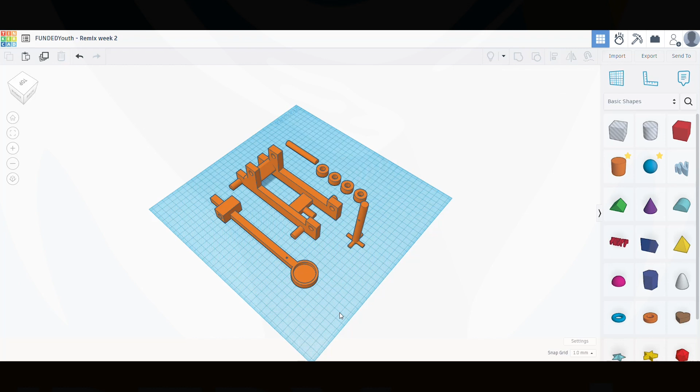Today we're going to start with the wheel. You're going to drag a cylinder onto the work plane and set it to the maximum number of sides, or 64. This is a good time to check that your snap grid is set to millimeters, because we're going to lower this down to 10 millimeters in height, but we will keep the diameter as 20 in both directions. Next, we are going to select our object and duplicate it.

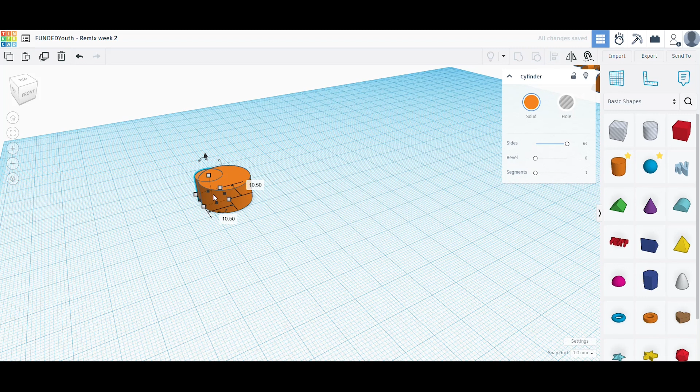Once you've duplicated the object, we are going to change our diameters to 10.5 and 10.5. You can either change it individually or hold the Shift key to change both at the same time, and we'll be turning this into a hole. Now select both objects and select Align, and we will align this to the center. Just be careful of misclicking off because you might need to redo it. Once you have both objects aligned in the center, you can make a hole to give us our first wheel.

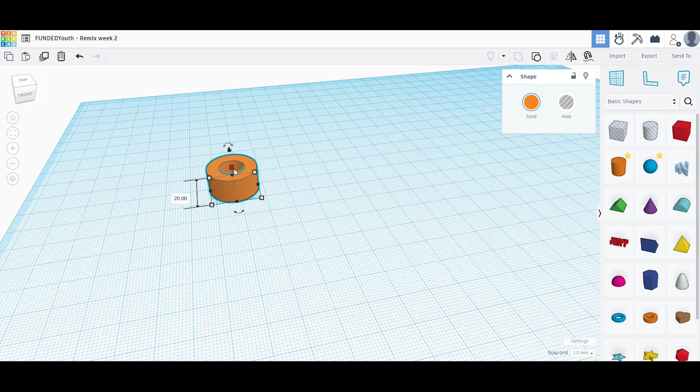Once we've done that, we can simply duplicate it a few more times until we get all 4 wheels. Select all of those, and then we're able to just move those to the top of our work plane so they're out of the way.

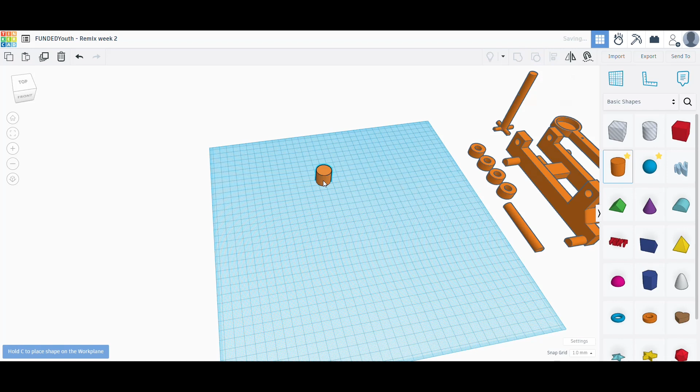Next up, we will be building the arm. Just like the wheels, we are going to start by dragging a cylinder onto the work plane. We are also going to increase the sides to maximum, or 64. For this cylinder, we are going to lower the height to 10 millimeters, and we are going to change it to be 40 by 40.

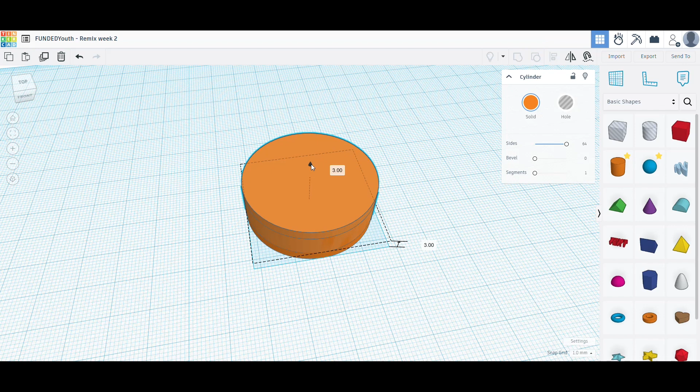Once you have this, we can duplicate the cylinder, and we are going to move this second cylinder up 3 millimeters. Select that second cylinder, be careful you're clicking on the right one, and we're going to change the dimensions to 34 by 34, but keep the same height of 10 millimeters.

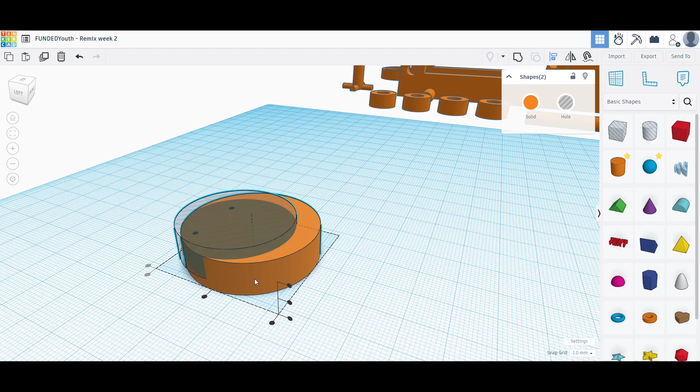After this, you can turn this piece into a hole, and we're going to select and use the Align tool to center it. Make sure that you've selected aligning off of the bottom cylinder, so that way everything remains lined up and 3 millimeters from the base. Once it's properly aligned, select again and group your items to create the top of the arm.

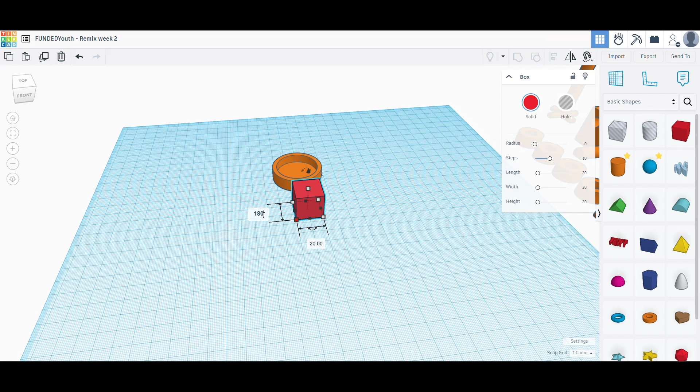Next, you are going to drag a cube onto the work plane. We are going to adjust the dimensions of this cube to be 180 in length, going away from the top cylinder we've created, and then it's going to be 10 width and 10 height. Once you've adjusted all of your measurements, it should look something like this, and you are going to roughly align it to the center of that top cylinder that we created.

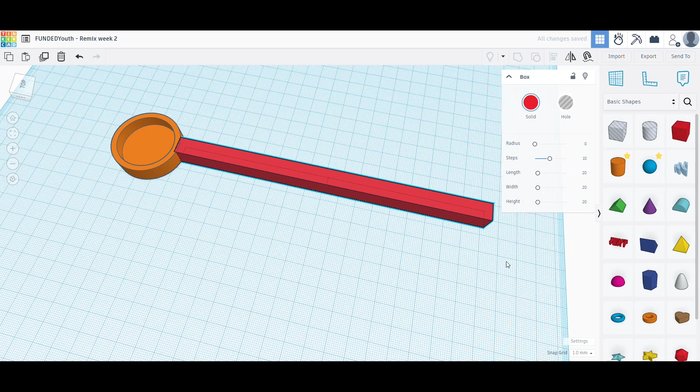Next, we will be dragging another cube onto the work plane. The only adjustment we're going to make to this one is making it 35 millimeters in length. After that, drag a cylinder onto the work plane as a hole and place it against the side of the cube. We are going to adjust the cylinder to be 10.5 in diameter.

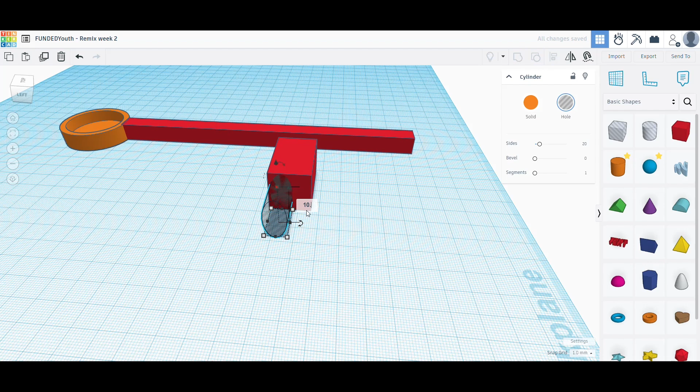And we're going to select both and align. Make sure that you're aligning to the red block so that way the hole can be centered on the object. You can then extend this object to go all the way through your block. If it's easier, you can also just call this length 45 millimeters and center it within the block.

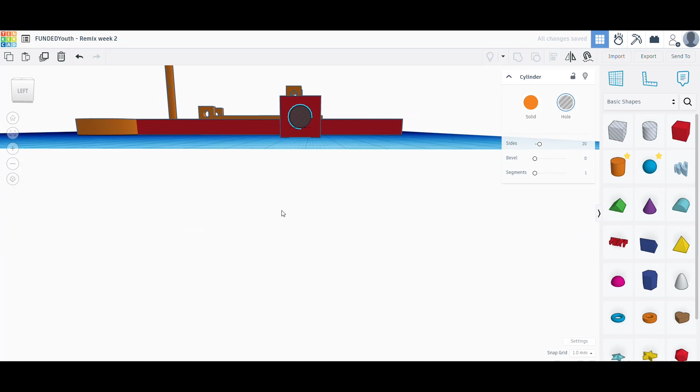Next, we are going to select the cube, the hole, and the earlier rectangle that we placed onto the work plane. We are going to align all 3 of these objects together. Make sure you're aligning them to the red block with the hole in it. You will want to make sure that the pin is centered, and then align it to the end.

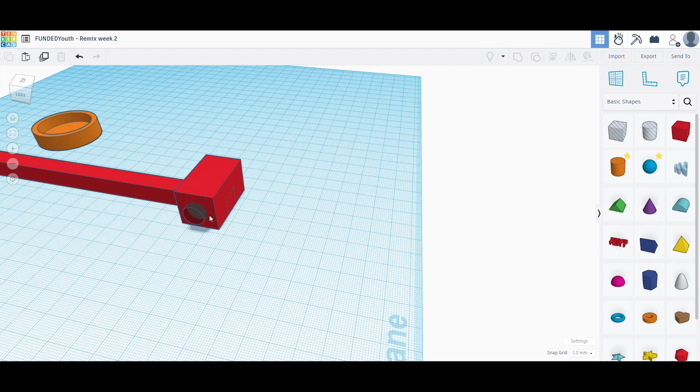Once everything is properly aligned, we are going to select that middle pin, and we are going to move it until it reads 35 millimeters away from the end of the block with the hole. Once this is done, you can select it and make sure that it is still properly aligned to the center in case there was any wiggle when you were moving it. And once that is done, you can finally group all these objects together.

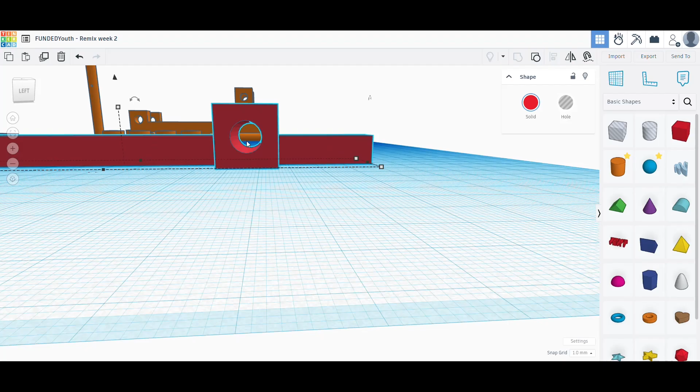This way, the hole will be able to go through both the block and the arm that we've created. Now we are finally ready to align the arm with the top of the head. Roughly bring the objects over and then select all of them and align to the red pin, so that way that orange cap is centered.

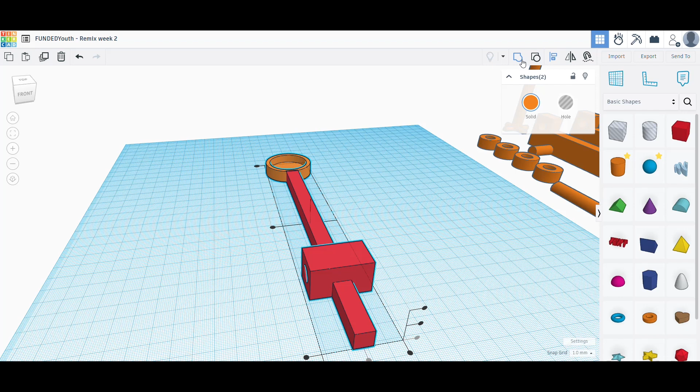Once everything is centered, we can group the object together. Once we've done this, we're going to drag another hole onto the work plane, and we are going to adjust the size to be 3mm by 3mm. This will be placed a little bit away from the top of the head, wherever you want, and we are going to align it to the center. And then once that is done, you can group it together, and that is the arm complete.

Next up, we are going to work on the turnbuckle and pin part. Drag another cylinder onto the work plane, and we are going to adjust the size of this to be 9.5mm in diameter both ways, and we are going to make it 100mm tall.

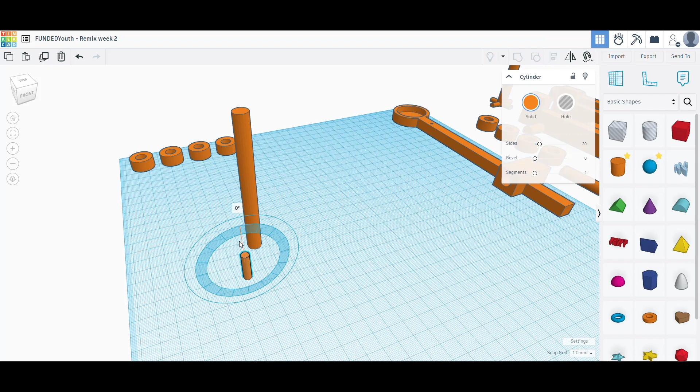Once you've done this, we are going to drag another cylinder onto the work plane. Then we're going to change this cylinder to a size of 5 by 5, and we will rotate it 90 degrees so it's perpendicular to the first post we made. From here, we are going to extend it to an overall length of 30mm.

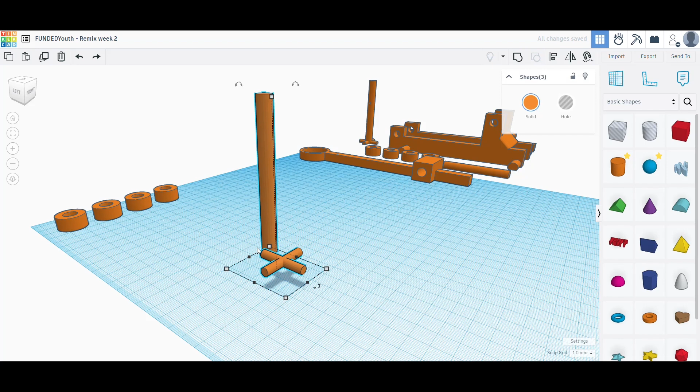Once we are at our final length, we are going to select the object and duplicate it. Then we'll select it, and in the horizontal plane, rotate it 90 degrees to create a cross. You can then select and group both items. Once these objects are grouped, you can lower them together, so that way they are on the base of the work plane.

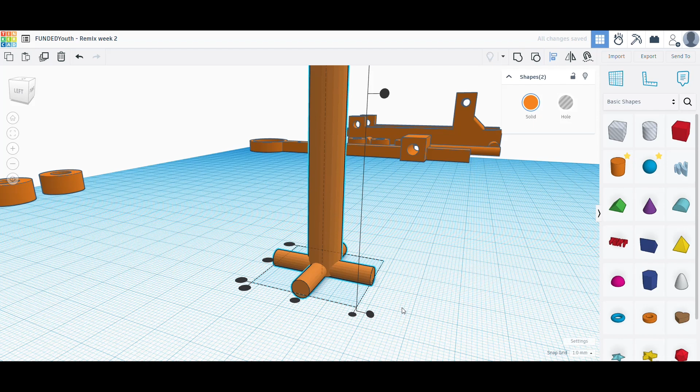And from here we can align our central post to this cross post. Select all your objects, click Align to make sure everything is perfectly centered. And once centered, group all the objects together.

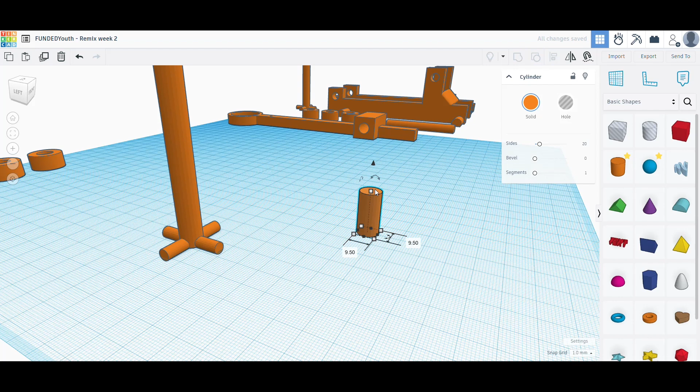Once this is complete, we're going to drag another cylinder onto our work plane. In this cylinder, we are going to give a diameter of 9.5 both directions, and our overall height is going to be 70mm. Now we're going to select this pin, we're going to rotate it 90 degrees and bring it down level with the work plane. Here you can see that it's currently 2mm below the work plane.

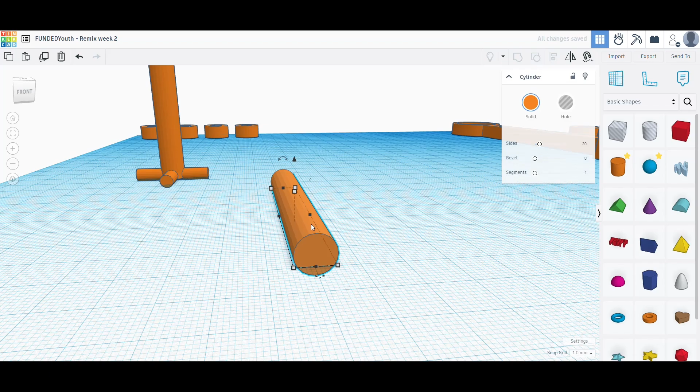We're going to duplicate our object, and we are going to move the second one off to the side. This piece will be used again later when constructing the main body. Now we can place our pin next to our stand, and we're going to select the hole block. We're going to make it go below the work plane and then large enough to encompass both the bottoms of the pin and the post.

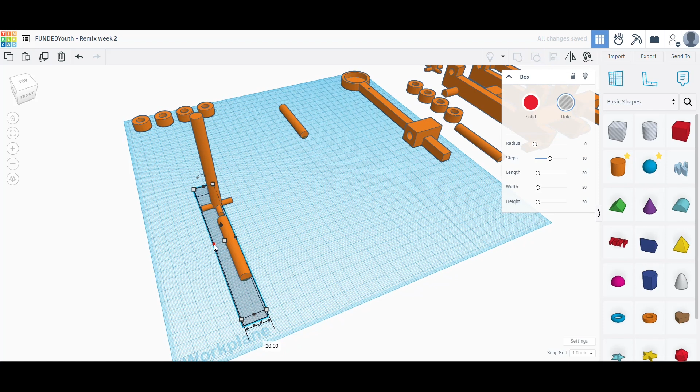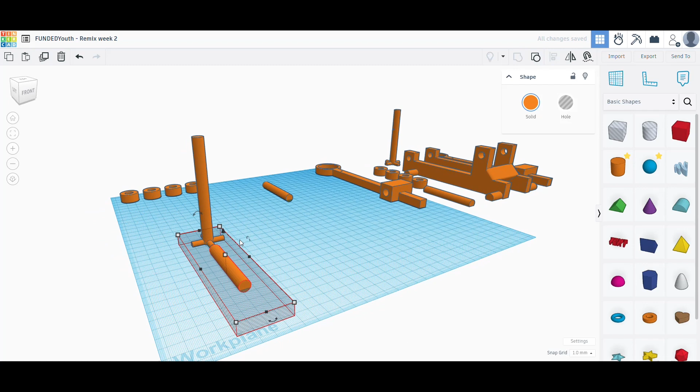We are doing this in order to create a flat bottom so that way when we take this file and 3D print it, it has a flat base to rest upon. We will make sure that everything is properly grouped with the hole, selecting all the objects. There we are. This way, when we click off of it, you can see that there is now a flat base on both the post and on the pin.

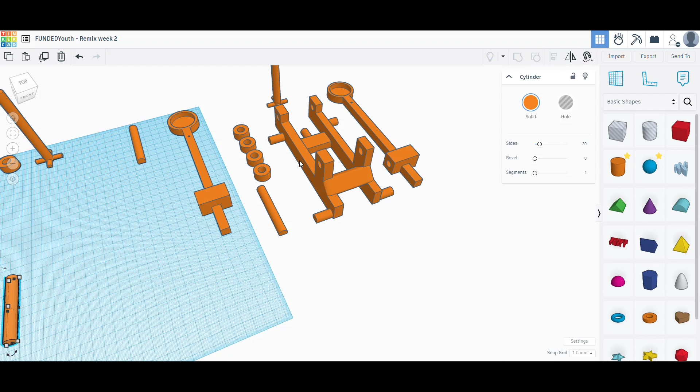We can now move this off to the side and prepare our workspace to finish this catapult off with the main body. Select that pin that you finished earlier and pull it into the center of your work plane. This will be used in part of our construction of the main body. We are going to move this pin off to the side and we are going to shorten the overall length to 20mm long.

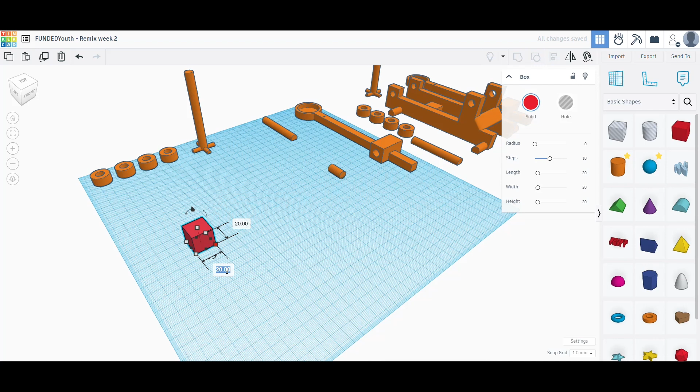Once this is done, you can set that off to the side for now, and we are going to drag a cube onto our work plane. We are going to change the length and width of this cube so that way it is 60 by 175mm. This will form our base, and we are going to leave the overall height at 20mm.

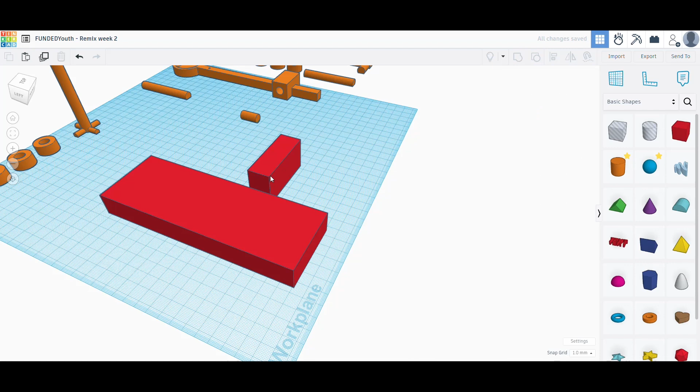Go ahead and drag another cube onto the work plane, and on this cube we are going to change the width and the overall height. We're going to make the width a total of 60mm, and we're going to change the height to 30mm. We'll leave the length as 20. Go ahead and duplicate this object so we have two of them, and we're going to extend the height of this one to be a total of 60mm.

Next up, we're going to select our first block and we are going to align it to the front of our base. You can just select both objects and we can use the Align tool to make sure it's perfectly centered and flush to the front.

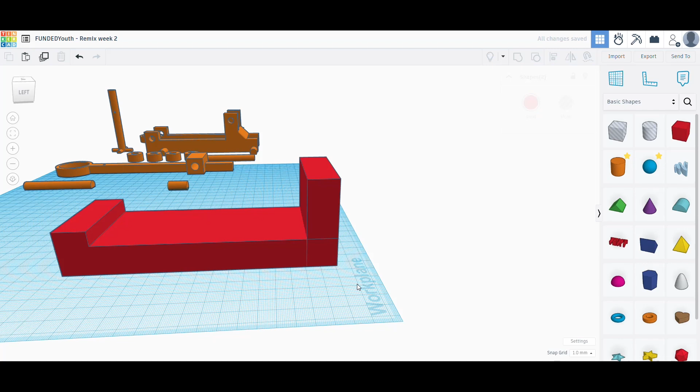Next up, we are going to do the same thing with the back piece. We're going to align it to center and to the end. Once this piece is aligned to the end, we are going to select it and move it forward 35 millimeters. Once you've moved this piece forward, we can select all these again and use the Align tool to make sure it remains in the center.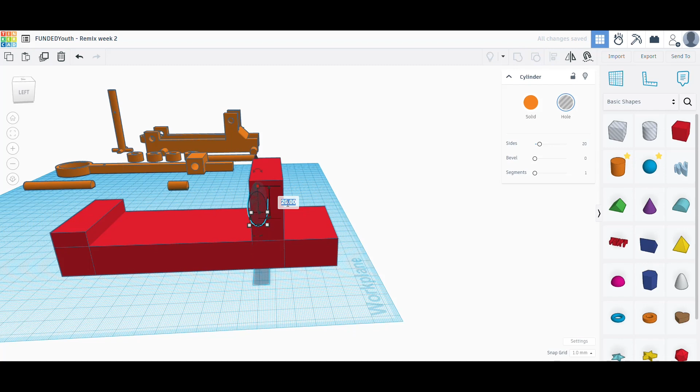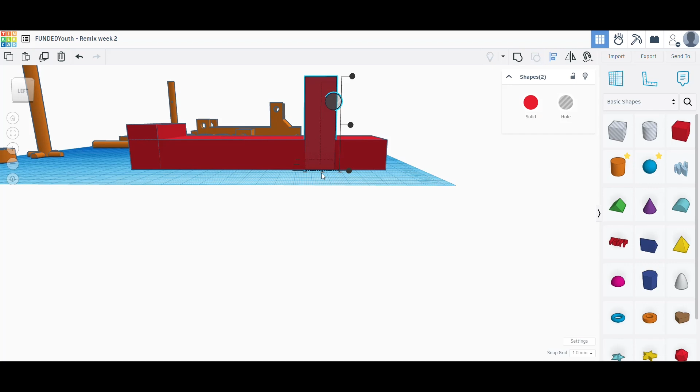Before we group it, we are going to add a hole. We are going to adjust the size of this hole to be 10 by 10 by 69. This way the hole will extend all the way through the block. From here we can select the hole and that piece and make sure that they are both aligned to the center of the red block.

We're now going to adjust the height. Go ahead and bring your hole all the way up to the top and then bring it level with it. Then slowly begin bringing the hole back down. We're going to make an adjustment to this measurement here to make it a total of 5 millimeters.

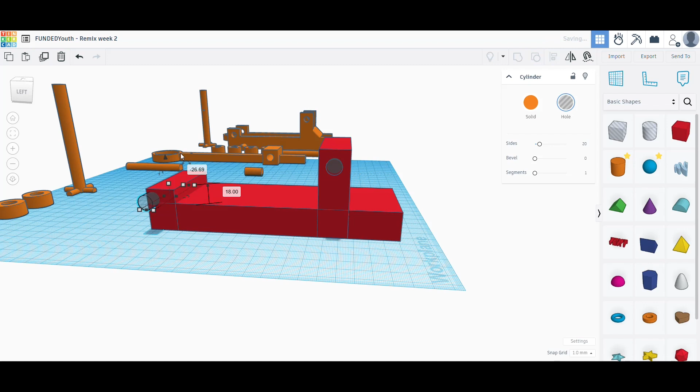We can now duplicate this hole and bring it over to the first block that we made. First, we're going to group those together, and now, just like before, we can select the block and the hole, and we can make sure everything is properly aligned.

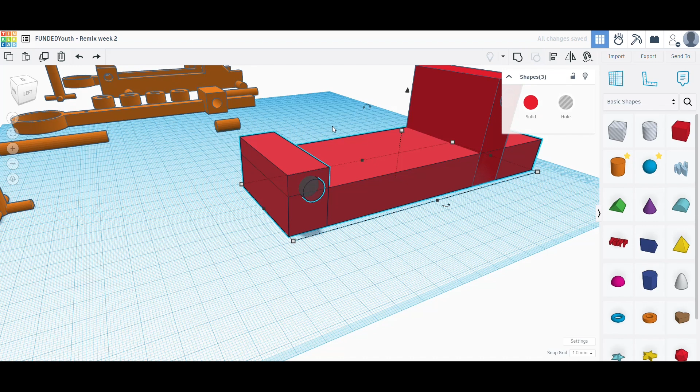Once everything is aligned, make sure you select all the objects and group them together. This makes sure the hole cuts through both the base and the block. And make sure that that end block is also grouped to the base, so it's all one piece.

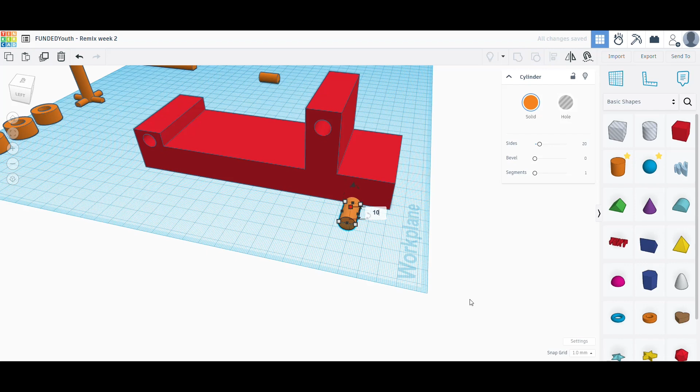Next up, we are going to place a cylinder onto the work plane, onto the side of our base. We are going to adjust the size to be 10 by 10 by 100 millimeters long. Next, we are going to duplicate the cylinder and drag it over to the other side.

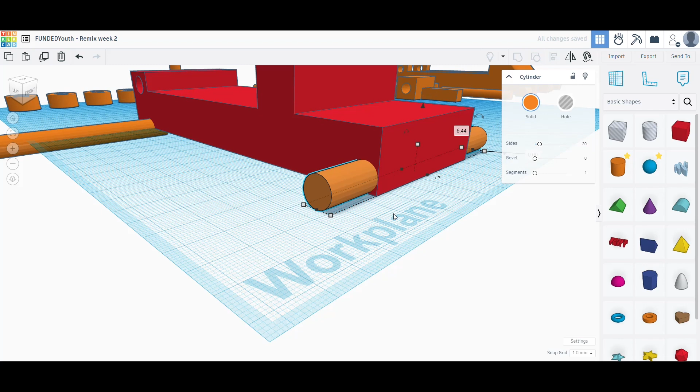Next, we move the rod into the base. We are going to try and get it as centered as possible. We're going to adjust the height so that way it is well within the block. However, we want the bottom portion of it to just go below the work plane. The easiest way to do this is to have the pin level with the work plane. From there, you can slowly lower it down 2 millimeters.

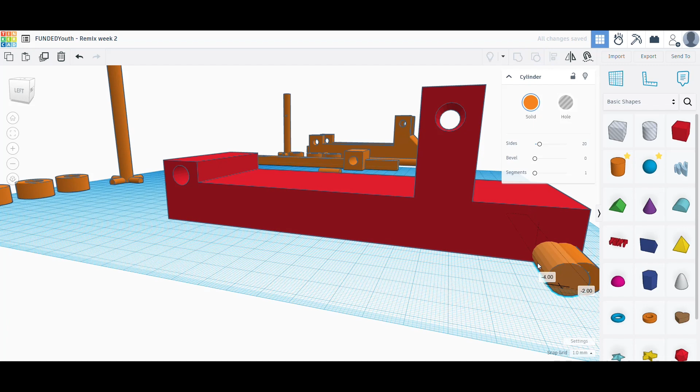Now we can do the same to the second post, but if it's easier for you, feel free to delete that and just reduplicate it in its current location, so that way it's a little bit more aligned and it'll be on the same level below the work plane, and you don't have to do any guesswork there. We're going to bring that second post a little bit further in, so it's roughly 15 millimeters away from the end.

Once all the pieces are in position, we are going to do the Align tool once again to make sure they are aligned to the center. And then we can finally group them all into one piece.

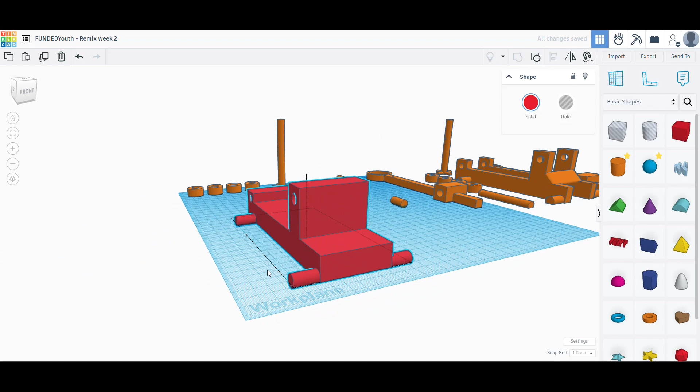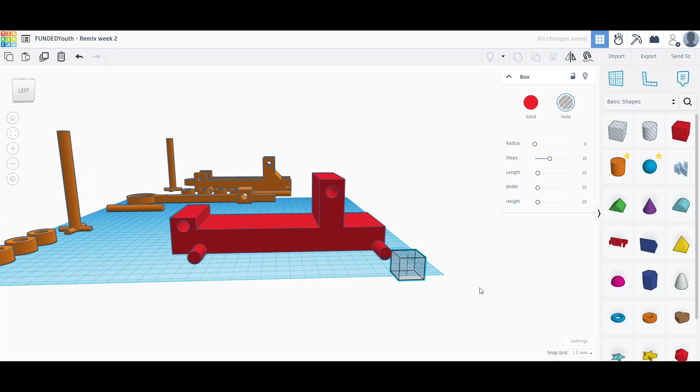It's now time to create the flats for the bottom of our base. For convenience, make sure you grab the piece that we finished earlier in a previous step and bring it next to the base. We are going to select the whole cube and bring it down below the work plane. We are going to adjust its overall size to be 18 by 118 by 232.

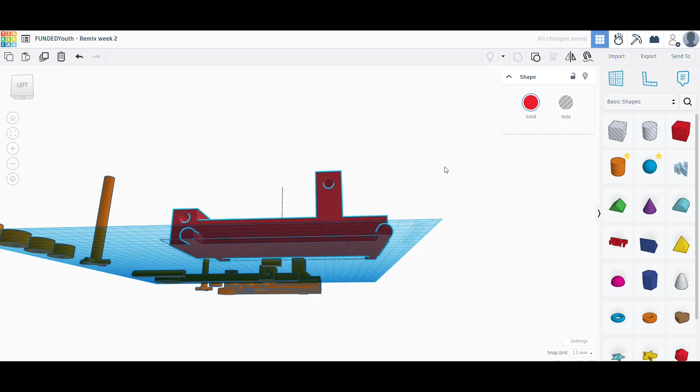Once you have the dimensions set, duplicate it and slide it over so you can group the piece and the hole individually. You can then group the second hole and the base to create our flats. Now all our pieces are sitting flush to the work plane.

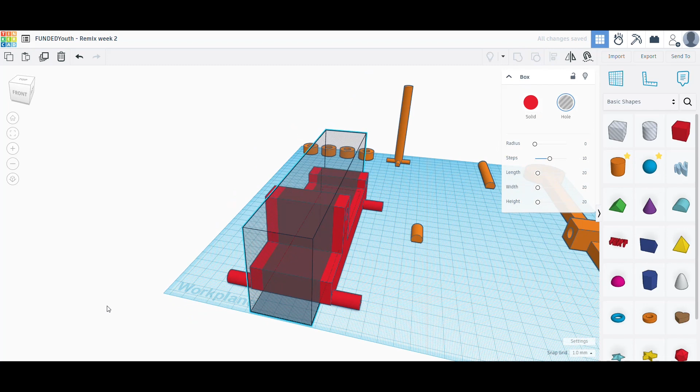Next, we're going to drag a hole onto the work plane. We are going to make the overall length of this hole 40 millimeters. Then you are going to pull the hole all the way through the base. Anywhere from 40 to 43 millimeters is acceptable for this step. Then make sure you lift it up so it cuts through the entire base.

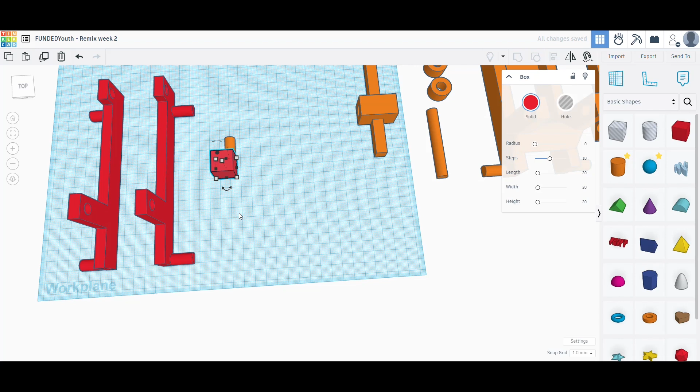Once that is done, we can align to make sure that it remains perfectly centered, so both sides will be equal. And we can group them all together. Now we are going to drag a cube over to the piece we finished earlier. We are going to adjust our dimensions to make this cube 10 by 60.

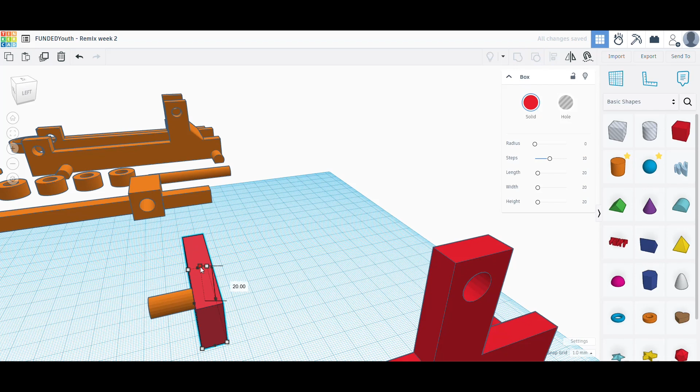Next, we are going to select both of the objects and we are going to align them. We can align the orange piece to the center and make sure that it is flush to the front of the block. We also want to make sure that both pieces are flush to the work plane. Now we can finally lower the height to a total of 12 millimeters tall. Select both objects and group them together.

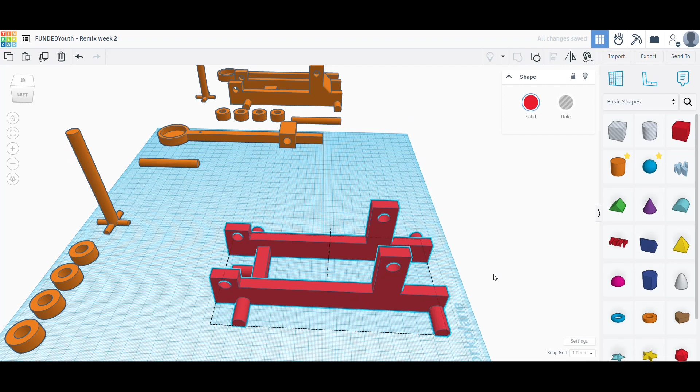We can now move this in between the two pieces that we've created on our base and bring it close to the front between those two back end nubs. Go ahead and select all three objects, and we can align it to make sure that piece is perfectly centered. Once that is done, group them all together to create a solid piece for the base.

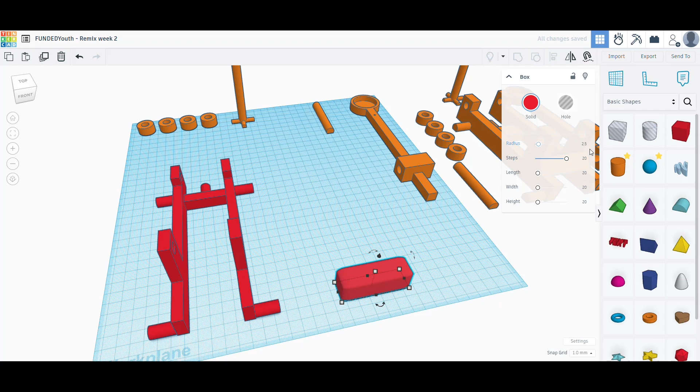Drag another block onto the work plane. We are going to change the width of this block to 60 millimeters. Then we are going to adjust the number of steps to maximum, or 20, and we'll change the radius to 2.5. Once you've rounded the edges, we are going to select the block and rotate it to an angle of 22.5 degrees.

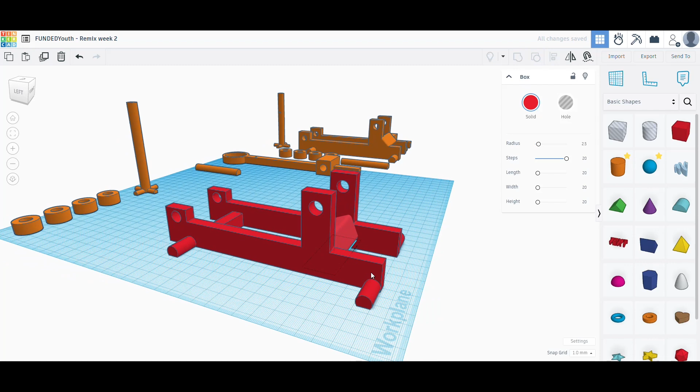We can now take this block and drag it over to the rest of our base. We are going to position it between the two tallest posts in the front and lift it up so it is directly between them. This part might take a little bit of finagling. So long as that block is firmly between the two posts, your build will be secure. But you can do it more similarly to the orange one that we showed you at the beginning as an example, or you can place it directly between the two red posts like we have here.

Make sure you select all the objects and align it so that way that block is perfectly centered, and once you're happy, group them all together to complete your base. Now you've finished all the pieces. They are ready to be exported and sent to your 3D printer.

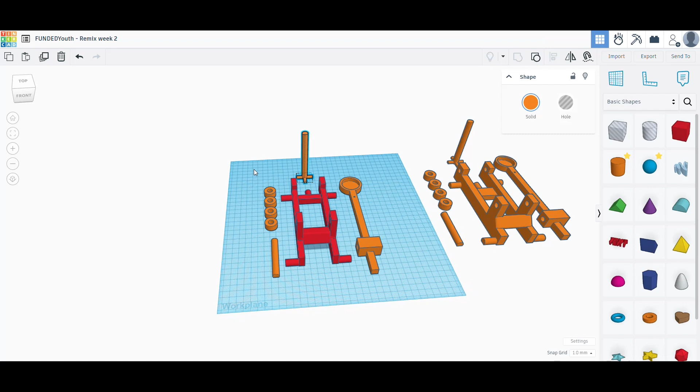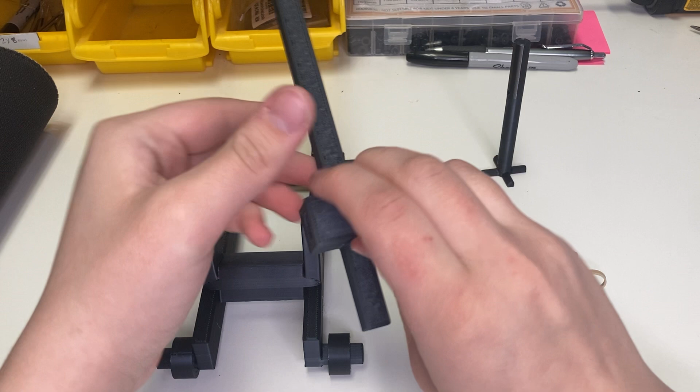Once printed, assembly is easy. The only thing you will need to grab is a rubber band. This will create the tension we need for our catapult. First, we can slide the wheels onto their post. They should slide on easily and move freely. Next, we can take the arm and the pin, and we can slide it through the holes to keep it in place.

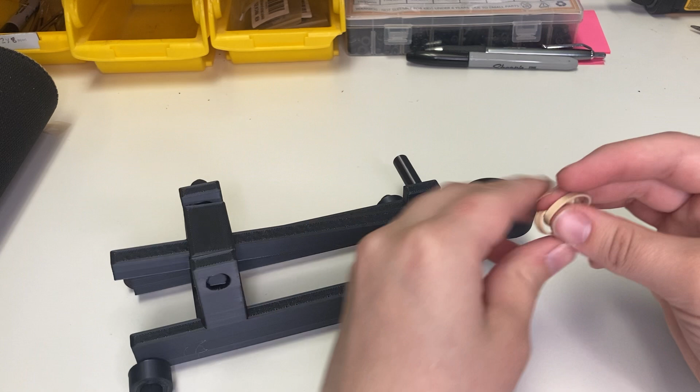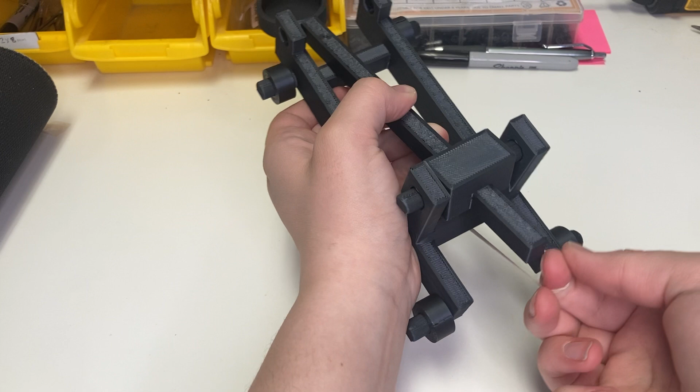The turn wheel then goes in the last two holes in the back. Next, you can take your rubber band, and we're going to wrap it around the small nub in the back. Then bring the rubber band forward and over the bottom of the arm to create our tension. And that's it! You can just pull back and release for your catapult.

Or, alternatively, you see this small hole here on the turn wheel? You could thread a piece of twine through that and through the small hole in the arm. Then you're able to use the turn wheel to crank the catapult back and launch from there. This can also keep the catapult from lifting too soon, so you can hold your fire. And congratulations, you have completed your catapult.

Now that you followed this tutorial, we want to encourage you to remix this design and change it up to make it your own. Maybe you'll change how the head looks, or work with the design of the body to make it something really cool. But we want to see what your imagination does.